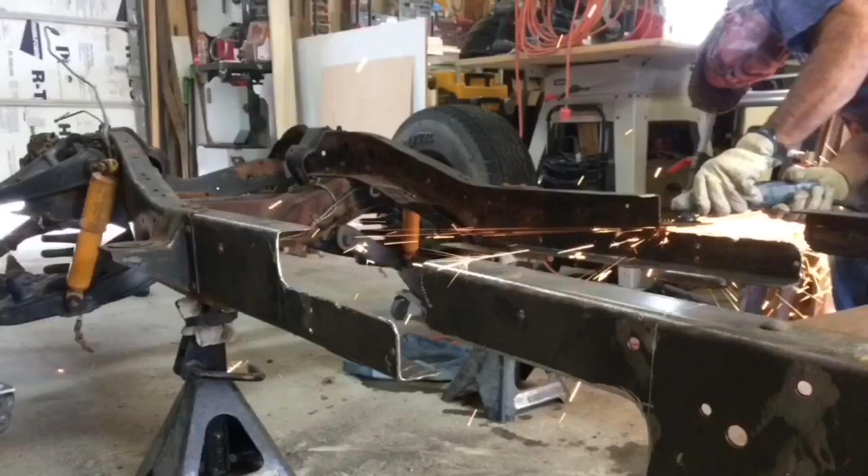So welcome back to Allison Customs Project Car TV. Today I have a little project.

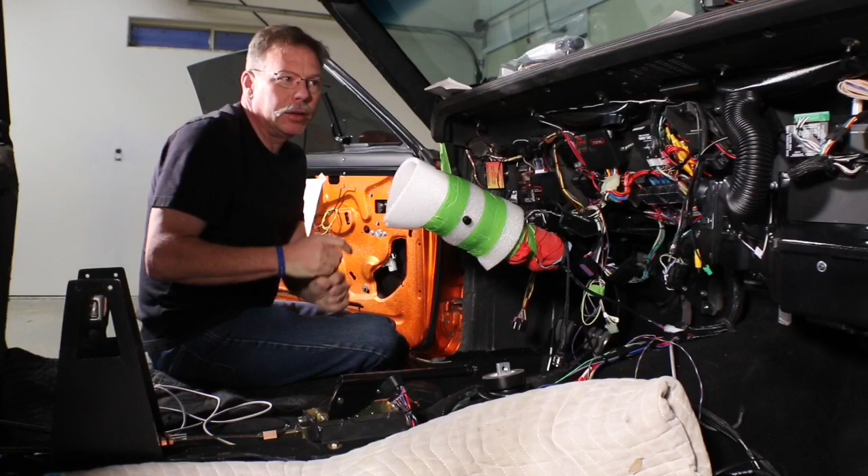For those of you who aren't watching some of the other videos, I broke my ankle a week and a half ago or so. Because of that, I've been pretty limited on my mobility. I got the walking boot, but even that, my ankle can't take a whole lot of up and down movement yet. So I'm trying to get a few things done. Mostly it's been work on electrical stuff, new diagrams and that kind of thing - busy work that needs to get done, but doesn't make for an interesting video.

Anyway, one of the things I need to do is program this little box here, and I'll zoom in on that in just a second. This box is a Lingenfelter part. What it does is take information from the ECM and convert that information to a signal that we can use for our gauges. To do some programming on that, you've got to plug this cord in.

Well, I mounted this box here, got it all wired up really pretty, powered up. I was thinking the plug was on the bottom here, which it's not. Took that off, and it's actually on the back side of the box. So we've got to come up with a different solution.

If we could do a rectangular hole easily, I think that'll be our solution, instead of drilling a round hole here and having a lot of slop. There's nothing really around this, but dust and other stuff could collect in there over time.

Instead of that, we'll throw this plate up on the mill, center up on that point, and then mark out a rectangle, or real close to a rectangle, just slightly larger than the end of this plug. That'll work, and then we can build our bracket to hold this in place.

Alright, so we're over here at the mill, a little well on the ways. Our mill is due for a cleaning.

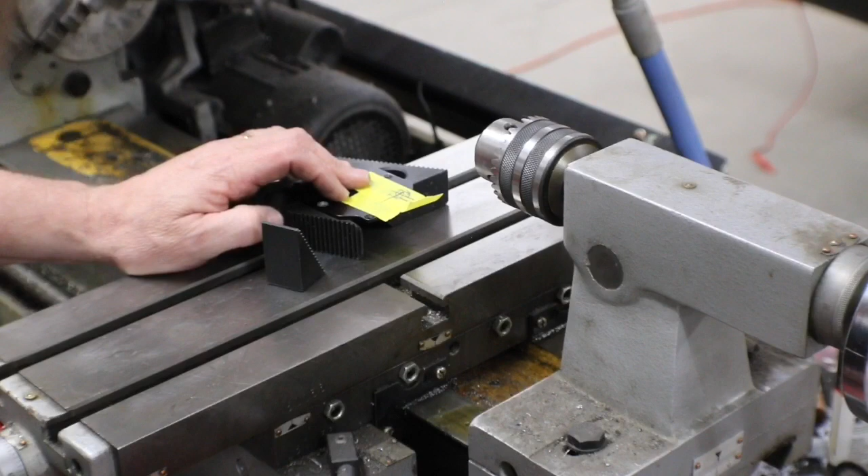Need a way to clamp this down, but we've got to leave area underneath it so we can have a mill bit go through there. So let's see what we've got that'll help us do this. We had something like that. I've got to get some smaller hold downs, that's a little excessive. That's maybe not quite tall enough. That's a little better. We can do the same thing on this side.

Try and stay far enough away from where we want to work. Let's try flipping this around this way. Yeah, that'll let us get a little more support further under there, and we can get a little further up on it. That would look good. T-slot nuts.

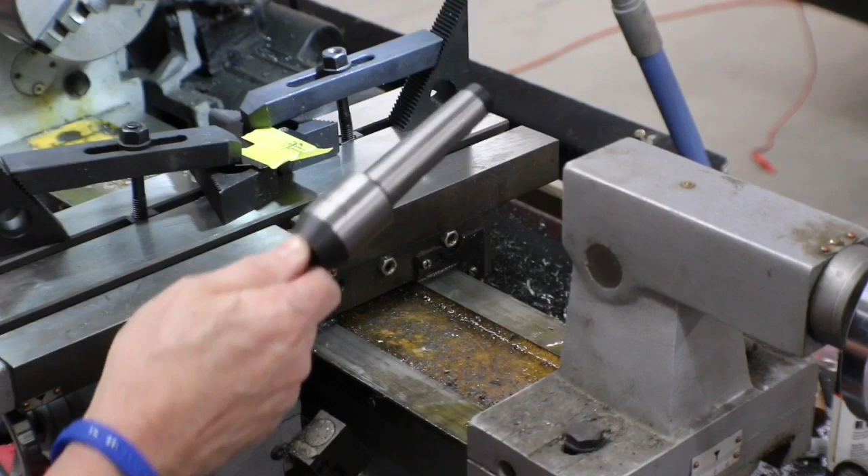Alright, so what I was looking for, I want to use this bit, it's a 3/16. What I was after was - I know these aren't called chucks, but for whatever reason I cannot think of the proper word right now. The smallest one I have is a 3/8, and this is a 3/16 mill on a 1/4 inch shank. So, not going to work.

Another reason, you know, I'm constantly adding tools to different locations. Well, there you go, another reason I need to add a 1/4 inch one of these. I have all the way up, I think this is a 1/2, 3/8, and I think I have a yeah, and I have a 5/8. So I'm going to make that one of my next investments, I guess. There's a few more tools for this.

So for now, we're going to use the drill chuck. But unfortunately, the drill chuck sits up in there fairly tight, or fairly close, so I'm not entirely certain that we can get the drill chuck. Yeah, we can't get it down far enough. So we need to rethink our mounting solution.

There's our solution, double stackable. All because I decided a rectangular hole would be much better than a round hole.

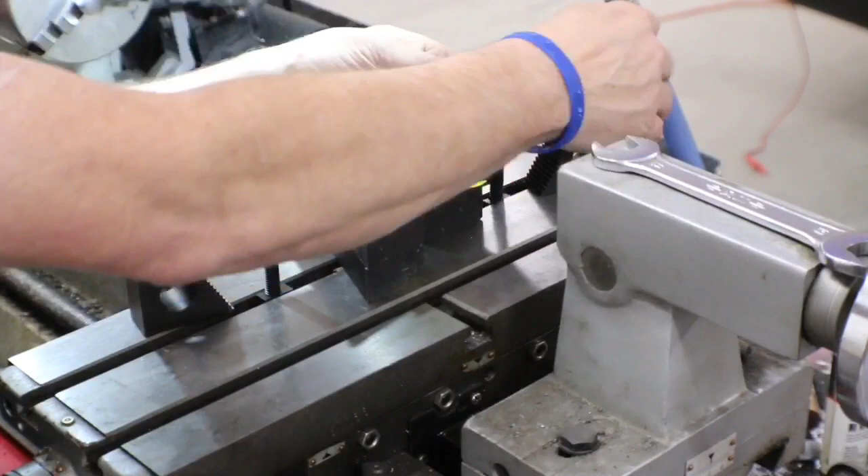What I'm gonna do, let's line up as best I can on center. So actually, let's take this one step further.

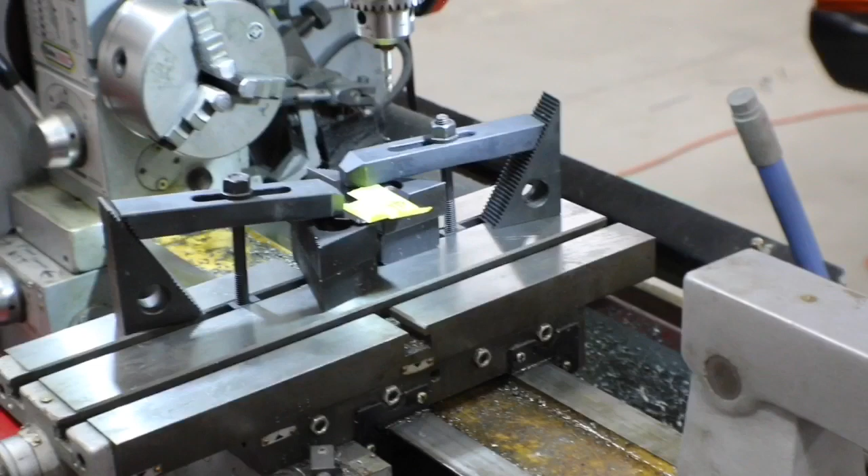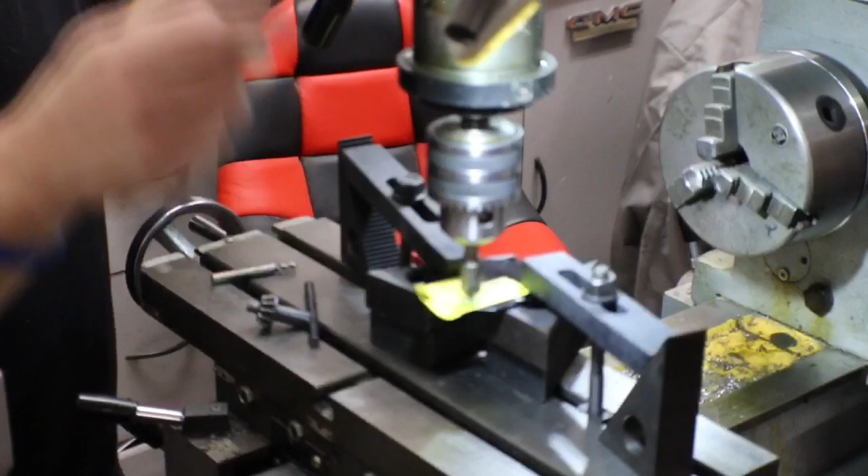We're gonna go one step further before we think about running that bit, that mill in there. Let's run, find us the center. And I think I'm going to move you to the other side so you'll actually be able to see. So I'm just going to use the point of that to get dead on our center.

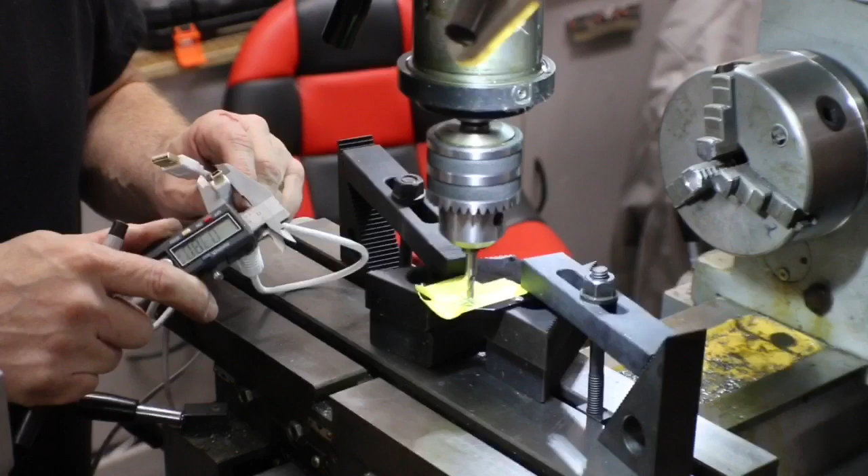And going back to our plug, we need it to be 377 width, so that'll be from that side to this side towards me. We need 377, so we'll probably go 400, because that leaves just a little bit of room to play with getting it in there. So we need 400 by, call it 320. So 400 by 320. That's about right on the speed.

See if we can get down through it.

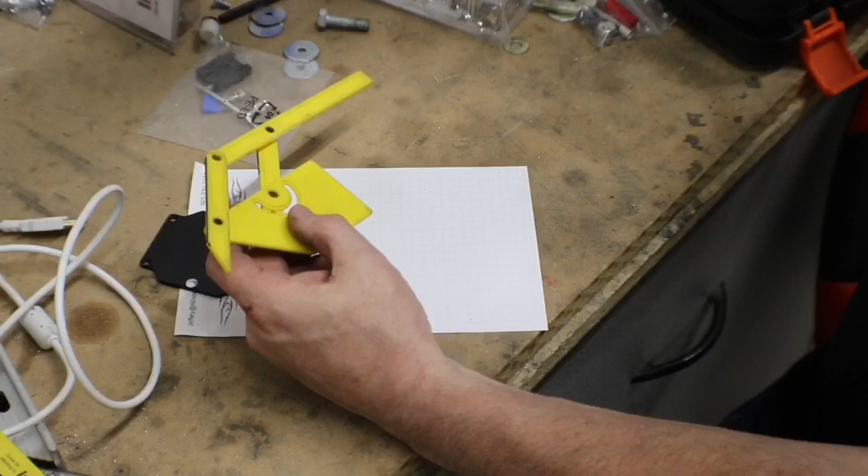So step 2 of our bracket is the design - I guess it's step 1 of the bracket, step 2 of what we're doing today. I went in there and measured between the boxes where they're mounted on the firewall versus where I had this box mounted, the Lingenfelter box, on that. It's on kind of a 135 degree angle, or 45 degrees off of the firewall.

So we need - let's see, if I draw it the right way, this would be like this. So yeah, I'm going to draw it this way. The short side there, the long side there. Okay, so this side is our firewall, and this is the area that we need to mount to.

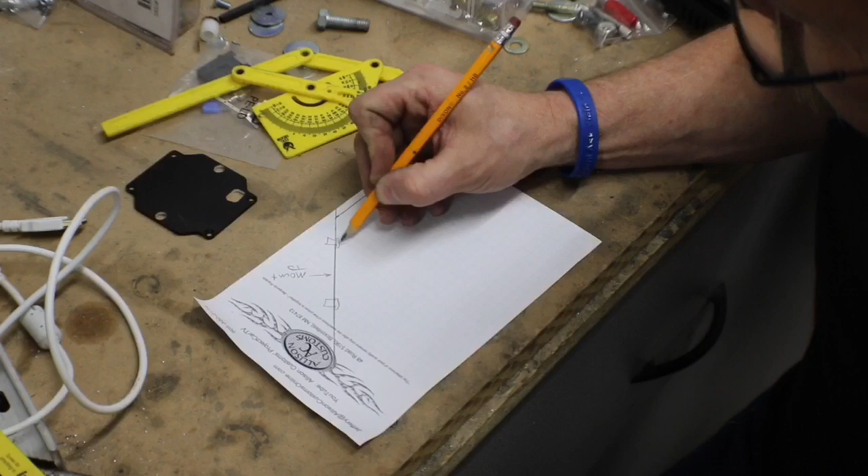What I want to do, I think, because I've already put 2 nutserts in here that these 2 holes here mounted to - what I want to do is come off of these, and so if we're looking kind of down on it as if you were looking down through the windshield, I want to make a bracket.

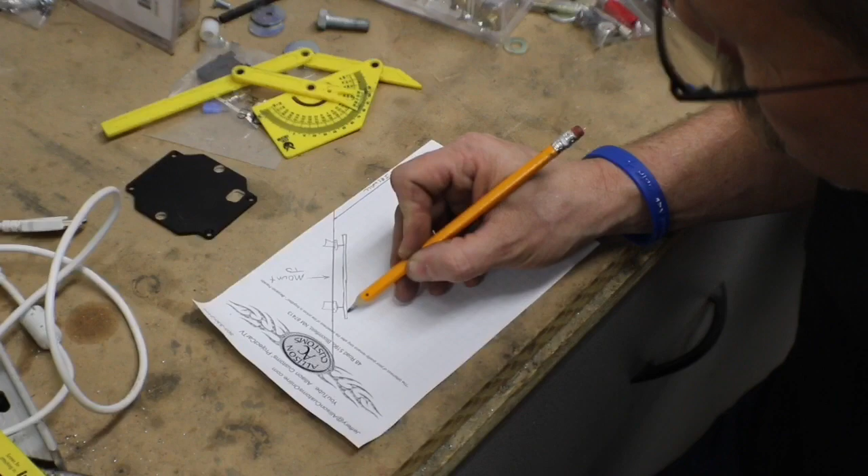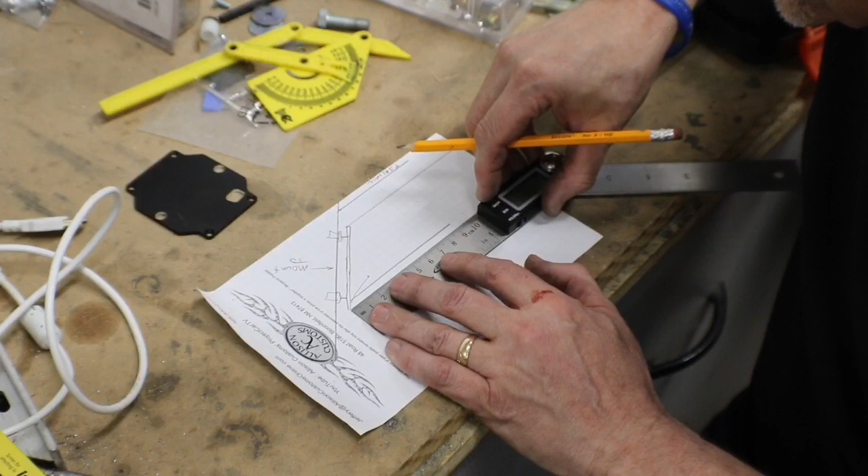That spans those 2 bolt holes, and then I want it to come out at an angle, and it needs to just come off at a 45, and we'll come all the way out here to this end. So disregard that line - I want to come off at an angle, and obviously I should have started drawing to scale to begin with.

So let's extend this. We'll come out here to there, come out here to here, be able to center it up. Okay.

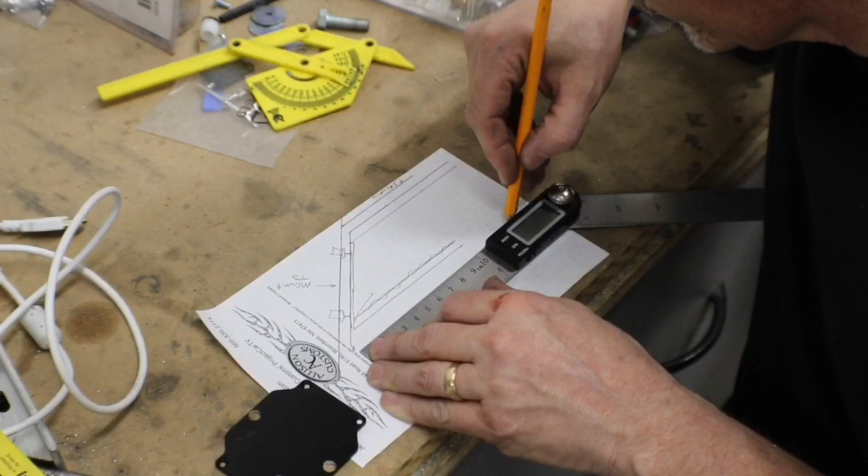Disregard all of these lines. This is looking down, you're seeing the thickness of the metal. And this doesn't have - I mean there's not a whole lot of weight here, so we can make this out of sheet metal. What I'm thinking though is that box could lay, and I think it'd actually go this direction, lay like that, so we can stop here.

Round these corners off, and we can bolt down through this, making our bracket - or our box lay flat - instead of it coming out at a 45 and coming way out here into an area where the back of the dash is at, and we've got an air conditioning vent there and all kinds of other stuff.

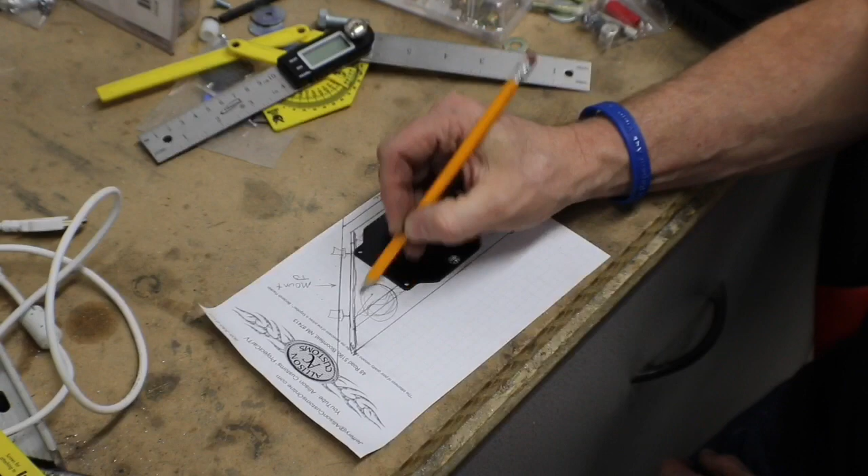If we can get it over here like this, I think we can put a big hole or something there just to keep stuff from collecting on top of it. So there's our top view design.

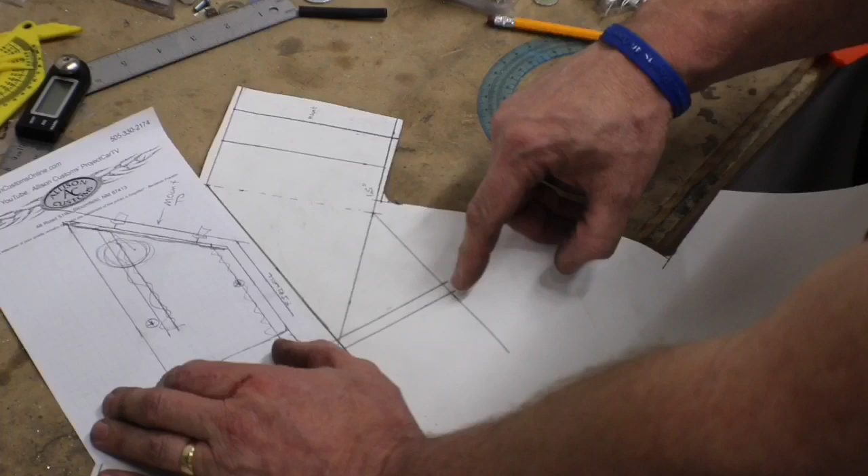Okay, so what you can see here is a laid flat version of this, and what I'm going to try and describe it. So dimensionally, from this point to this point is 3 inches, which from that point to this point out here, here to here is 3 inches.

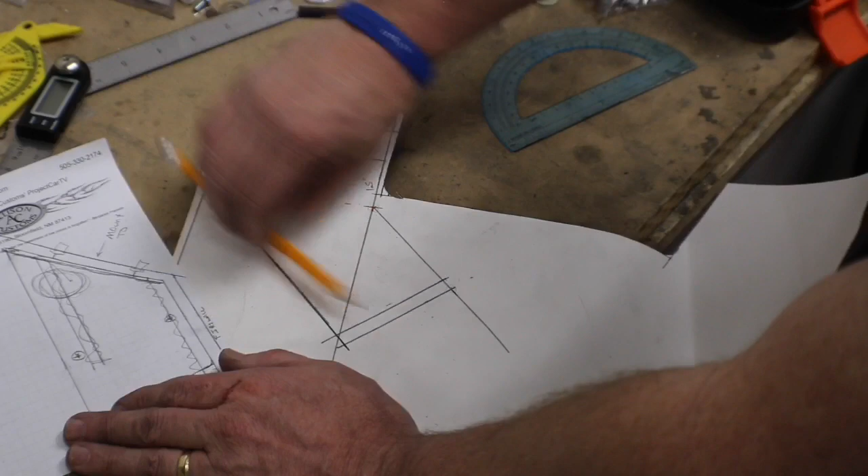We don't care what the length of this leg is, because we know we need a 90-degree corner here, and we know because from the firewall to the angle - so if I lay it out here, from the firewall to the angle where the mount is - it's 135 degrees or 45 degrees, depending on whether you're measuring the inside or the outside.

So what we need is, when this mount is laying here, to get this angle - this would normally be 135 degrees also, or 45 degrees on the top end. So 135 degrees here or 45 degrees there.

So I started drawing way back here. I basically laid out a line across the top, and this became my straight line, because there's not a straight line left, a factory edge left on this piece of cardboard. So I drew a straight line - that became my work-from-everything line.

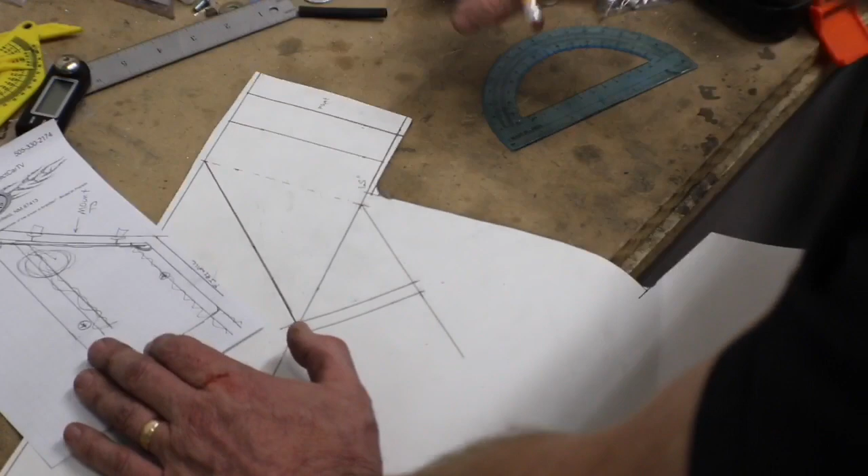Once I had that, then I drew a parallel line to it, which was this line, and that gave me my mount location. So I was going to start back here, and then I realized I don't need this to lay in there and have lots of room above it to get to the bolt holes or anything - it can be pretty snug.

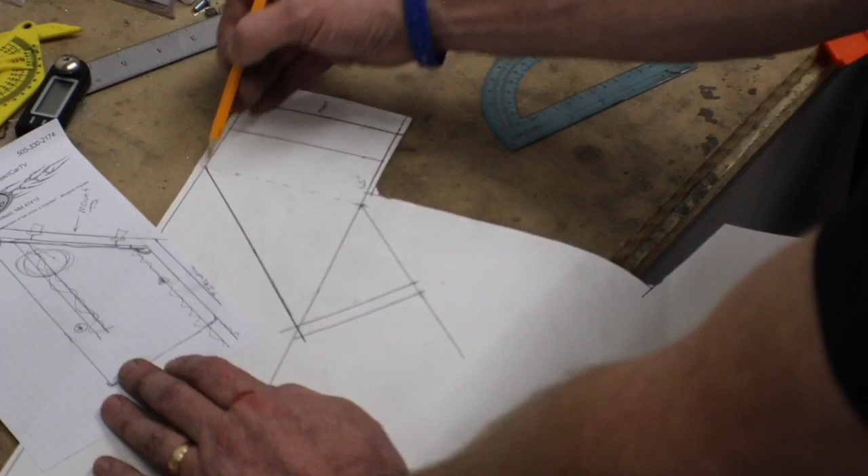So I moved this line in, and I needed to get out here onto the paper, so from here to here is 1.5 inches. Then I laid my 135 degree line off of this parallel, and I just drew a straight line. I went up here, I transferred this point up here, which means this is 1.5 inches, and another 135 degree line, or 45 degrees, however you want to measure it, depending on which side you're going to measure.

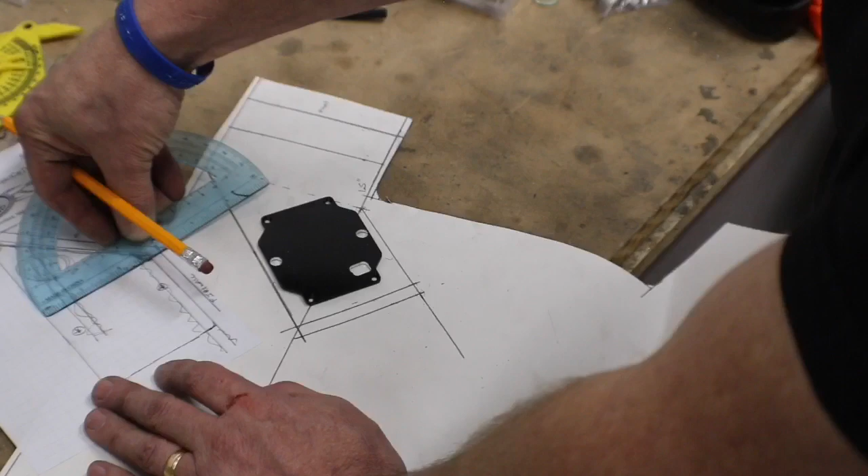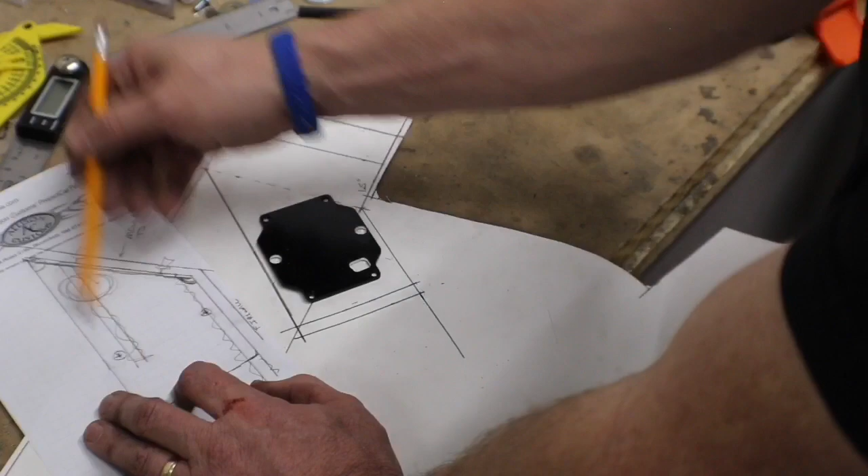Made that - these two are parallel, and when I measured it, I've already forgotten the exact number, but I measured it, and it was 2 3/4 inches that I needed. It didn't matter, because I knew I needed 4 inches up here, so I measured this line to begin with, the mount line. That gave me the dimension going this way. When I drew this, I think I worked it backwards - I laid this on here.

I said, okay, I need a line here and a line here. Wherever they end up on this 45, that's the length of the mount side. So whichever way you work from, this ends up being 4 inches, and this ends up being 2 3/4.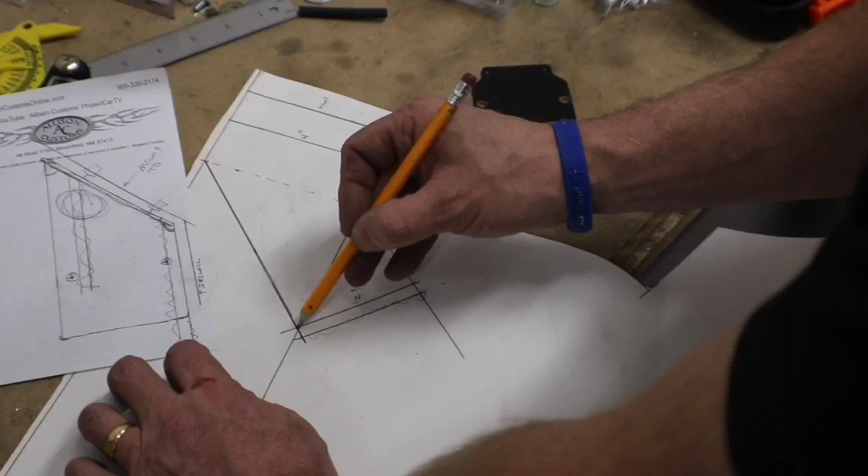So if you're looking at this, we're going to delete this. We're going to cut here, here, here, here, cut all the way back to here. We're going to bend it on this line so that this is 45 degrees to this. The bend will be 90 degrees, but this plate will be 45 degrees to that plate.

I'll cut it out of the paper, go test fit it. Then we'll come back, and if we need to make some adjustments for clearance, we can do that on the cardboard before we cut it out.

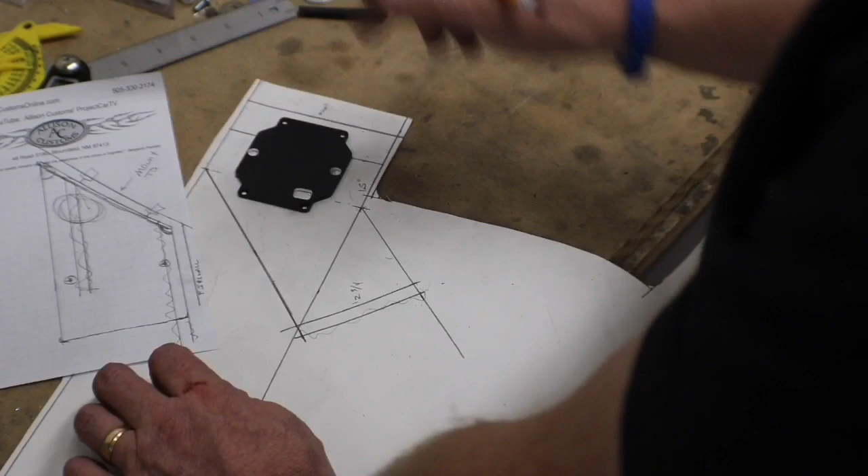So I went back and forth to the car about half a dozen times, and I ended up trimming off over 1 inch off of this side, and then I rounded the corners, and that got it to where it would go far enough.

Closer to you if you were in the driver's seat, moving closer to the back of the side of the actual dash, to clear all the other component boxes that are mounted to the firewall. But then I only had one hole over here that I was gonna use, one of the bolt holes, and it was almost center.

So I ended up adding 3/4 of an inch back onto this side, and that's what all the tape is. And so now that fits.

We could actually shorten the top here a little bit more, and I think I will, and that'll kind of pull it up a little bit. And I'm not sure how I'm going to mount this to this yet. I mean, it'd be simple, 2 bolts and 2 nuts.

So right now with the dash out, it's super easy to put this in and put the nuts and everything on it. But later on, that could be troublesome.

So I'm thinking what I want to do is probably try and put some nutserts in here in the black plate and drill from underneath. That way you could screw in from underneath, and if you had to take this off, you take those 2 screws off, you can lift this out of the way.

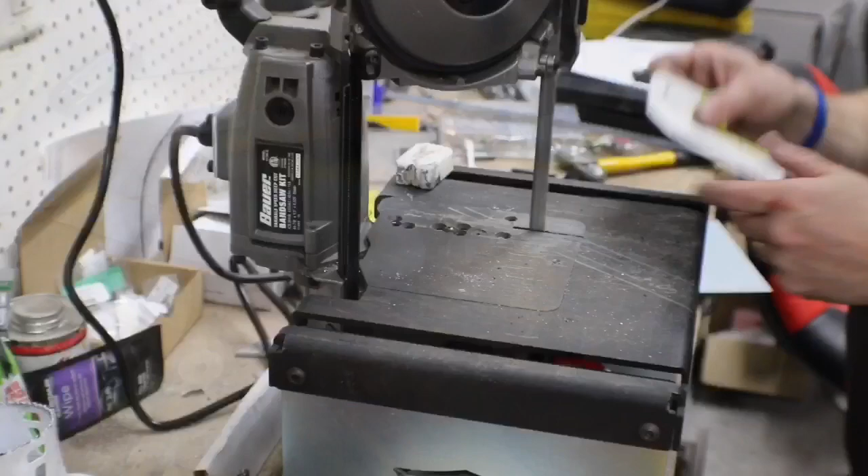All right, so here's how it worked out. Holes in it, and everything fits.

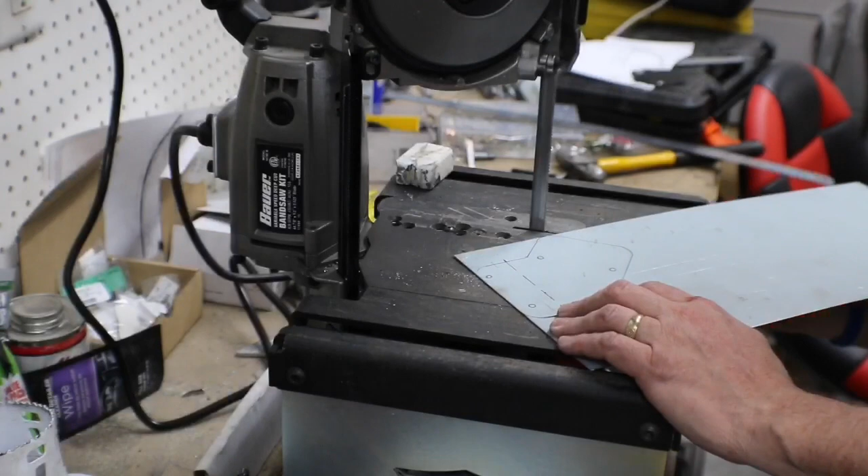There it is, drawn out, and we're gonna get this cut out and then fold it, drill the holes. Actually, let's drill the holes first.

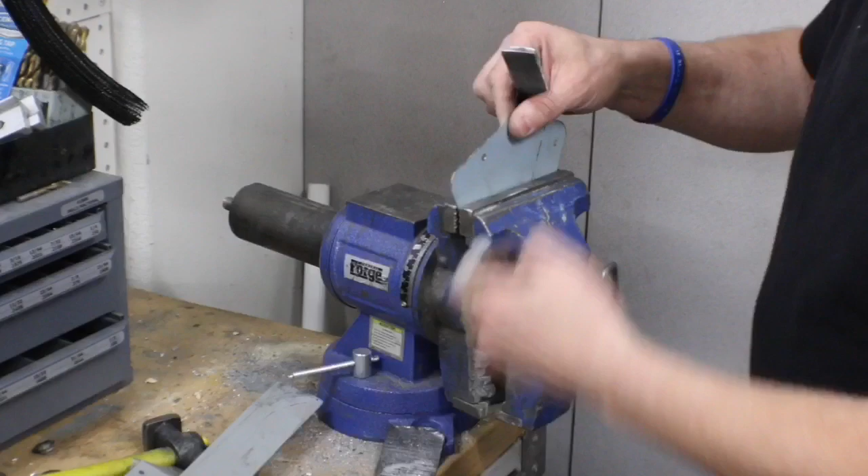Let's put this in a vise. It's funny when you'll work twice as hard as you need to trying to do something that if you just use the right tool, it's not that hard.

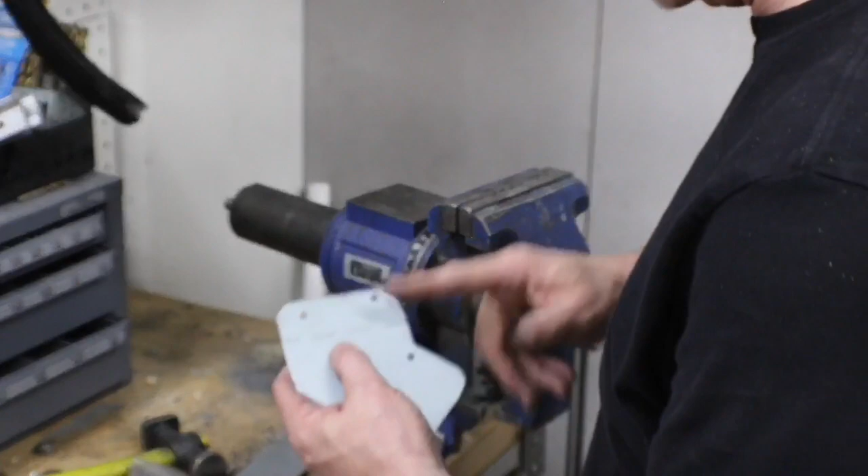There we go. So now we just need to bend it on that spot right there. There's a couple ways we could do it. We could slide it in here. It almost fits. We could do it this way.

We could take it out, and I have a bender out in the other building where I'm not going to take the camera because of my foot. So I'm going to run out there, fold this, and I'll be right back.

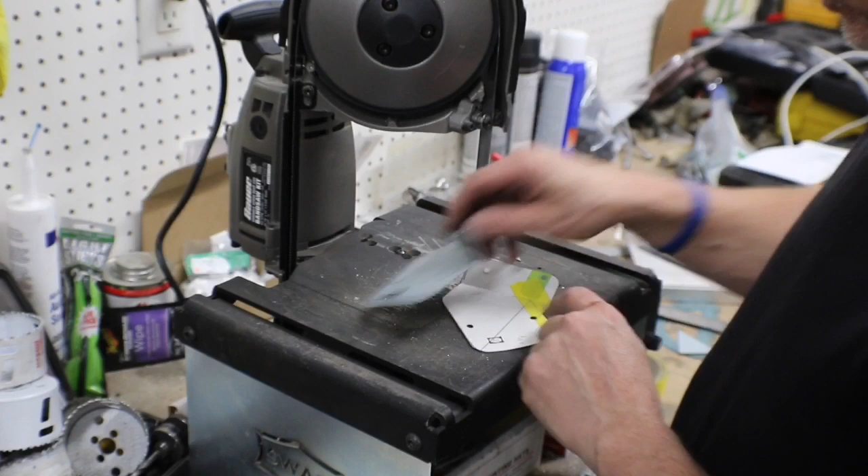There we have it. From that to that to that, and this will mount on top of it. So all I've got to do now is figure out my mounting situation for this plate, and probably paint that up black, test fit it first, but paint it up black and get that installed in the car.

Get a shot of that so we can see how we changed everything just to make it accessible for our plug when we go to program that. Okay, sorry for the camera.

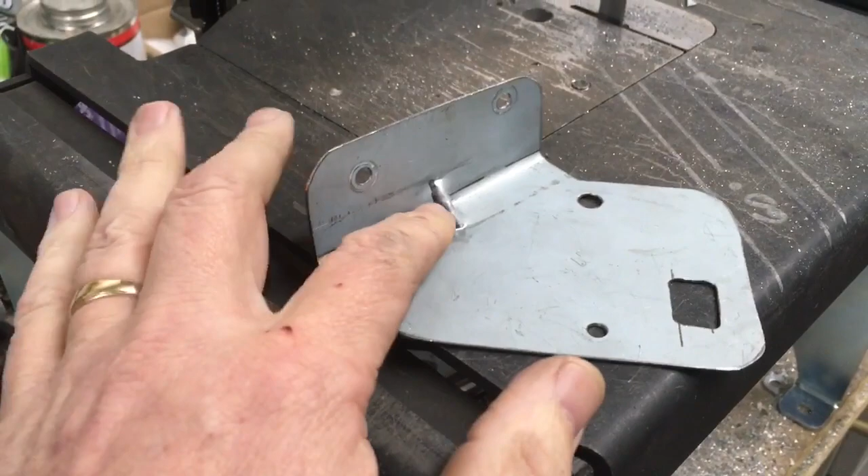One last thing I forgot to show you guys last night was this rib that I put in the bracket, and that's to keep this from ever basically unfolding. The way I do that—please excuse my very filthy workbench.

To make that little dent or rib, if you will, just take a piece of angle iron, cut a notch out of it, and then I file the edges so it rounds a little bit, to try and keep it from splitting the sheet metal.

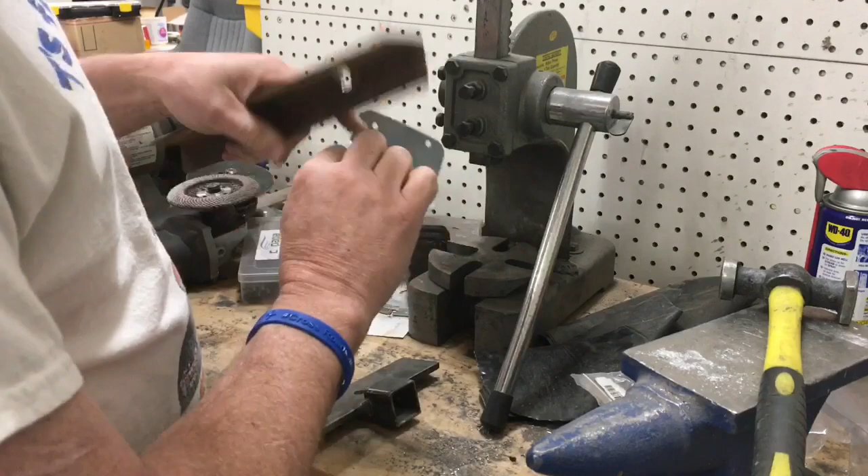Then I marked the center. You can see the remnants of a black line in there where I wanted it. Same on this side. I laid it on here, lined up the hole where I wanted it, and marked the outside edges of the angle. I lay that on there.

I made this piece a long time ago for helping me do other kinds of folds, and get this in place. Sit the male side of our die, if you will, on there, and then just pull down.

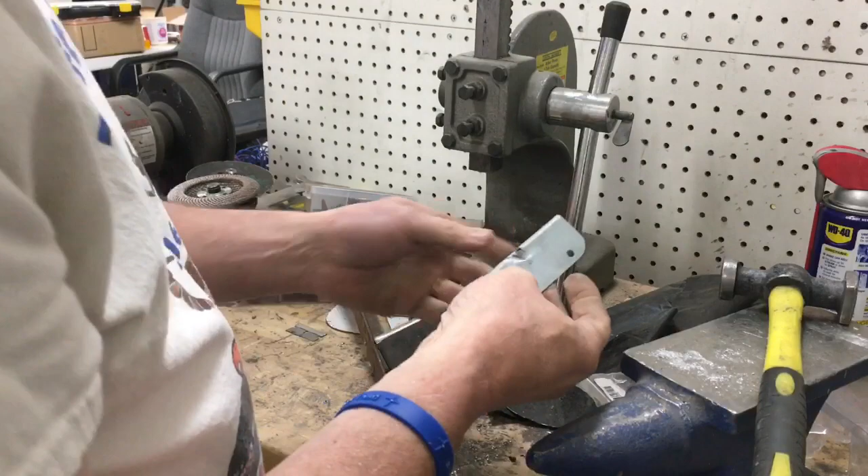I made that a pretty big rib—it's probably excessive for what I need. And because this is sheet metal, it leaves a little bit of a fold.

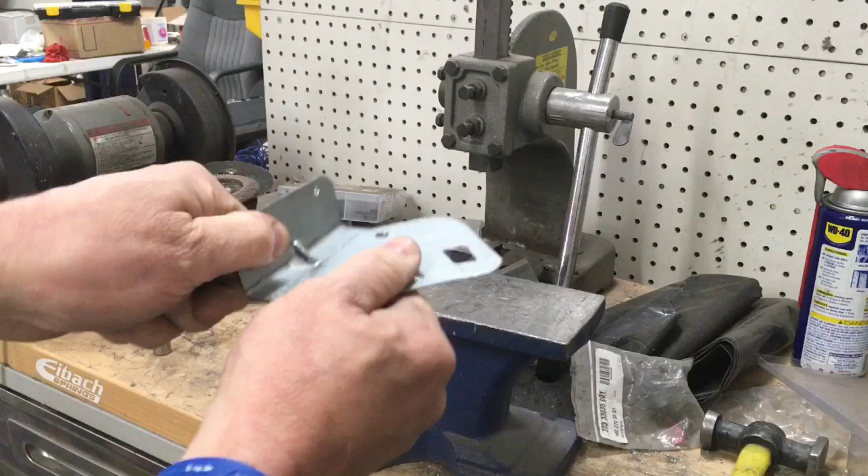So then the last step is you've got to come in here with a hammer and straighten things back out. That's just one more little step to make this very rigid. You can't—I mean, I'm trying and I can't really unbend it. You could still bend it out here somewhere, but it really improves the strength, and it's a really simple process.

This took maybe—I cut it on the bandsaw, cut 2 slices, then just drilled a hole through both sides, then used a file to clean it up. Took 10 minutes. This, like I said, has been around for a long time.

It's just a piece of 2-inch flat bar, I think 2-inch with a ground edge on it that's not sharp, just beveled. And then I welded a piece of box, a little larger than my press, to get that in there.

And it doesn't take a lot of force to get that. So one more little step, and then this now can get painted and be ready to be installed in the car. Well, there we have it.

One bracket mounting our Lingenfelter box, allows our cord to go through it so we can plug the other end of the USB cable into a laptop for programming. Currently we're only planning to use 2 or 3 channels, but we have 4 available, so they're all run into this plug over here, which you can barely see on the edge of the camera.